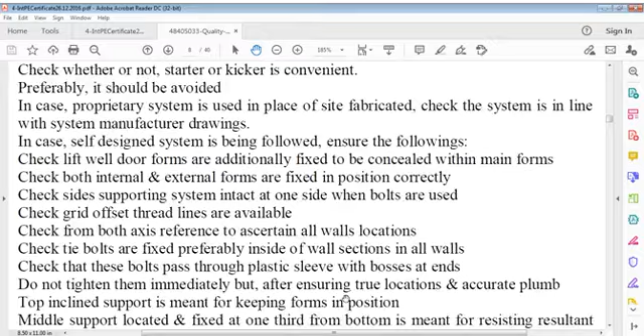of site fabricated: check the system is in line with the system manufacturer's drawing. In case a self-designed system is being followed, ensure the following. Check lift well door forms are additionally fixed to be concealed within main forms. Check both internal and external forms are fixed in position correctly.

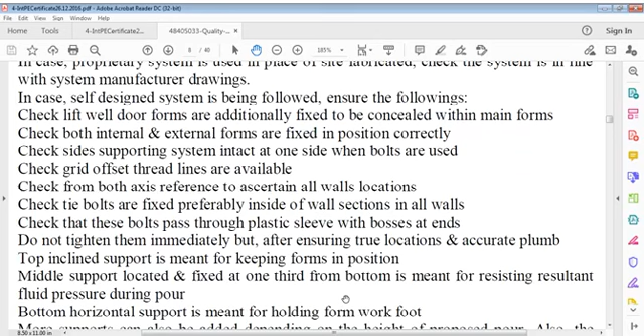But after ensuring true locations and accurate plumb, the top inclined support is meant for keeping forms in position. The middle support, located and fixed at 1/3 from the bottom, is meant for resisting the resultant fluid pressure during the pour. The bottom horizontal support is meant for holding the formwork foot.

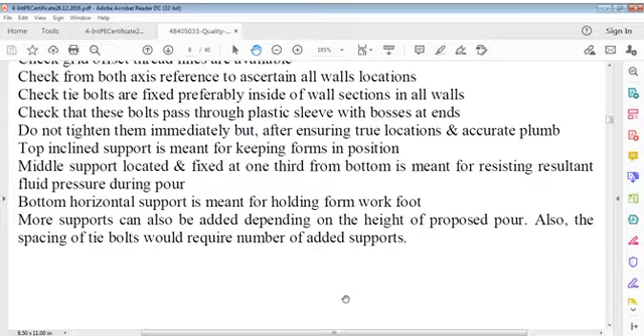More supports can also be added depending on the height of the proposed pour, and also the spacing of tie bolts would determine the number of added supports. Check whether or not tie bolts have been designed to withstand forces imposed by liquid concrete safely. Check all corners of forms are well anchored without any worry of opening or relocation of forms or getting twisted.

Also check internal forms, which should be provided with adequate cross inclined supports located in the middle of forms at various locations. Check whether or not heavy plumb bobs are hung from the top of forms at at least 3 or more locations, depending on the length of the RCC wall. A heavy plumb bob means either a heavy concrete piece or brick.

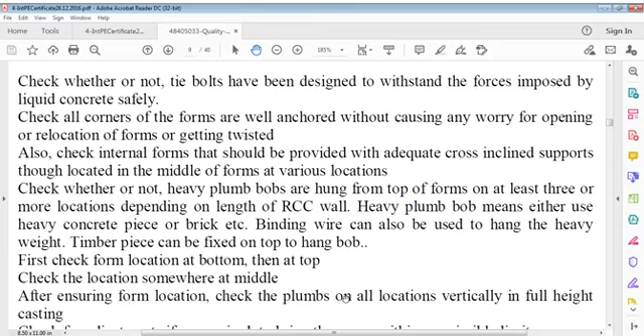Binding wire can also be used to hang the heavy weight. A timber piece can be fixed on top to hang the bob. First check form location at the bottom, then at the top. Check location somewhere at mid after ensuring form location. Check plumb at all locations vertically over the full height of casting. Check for adjustments if required to bring errors within permissible limits.

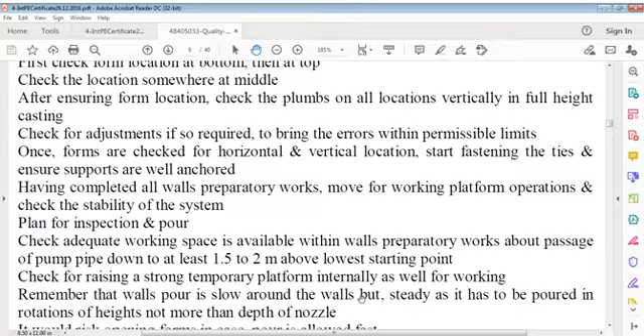Once forms are checked for horizontal and vertical location, start fastening ties and ensure supports are well anchored. Having completed all wall preparatory works, move to working platform operations and check stability of the system. Plan for inspection and pour. Check adequate working space is available within the walls for passage of pump pipes down to at least 1.5 to 2 meters above the lowest starting point.

Check for raising a strong temporary platform internally as well for working. Remember, the wall pour is slow around walls but steady, as it has to be poured in rotation of heights not more than the depth of the nozzle. There's a risk of opening forms in case the pour is allowed fast. Walls are not an element like columns or beams and therefore require good checks and attention. Lift well walls are a complicated pour that should be taken due care of.

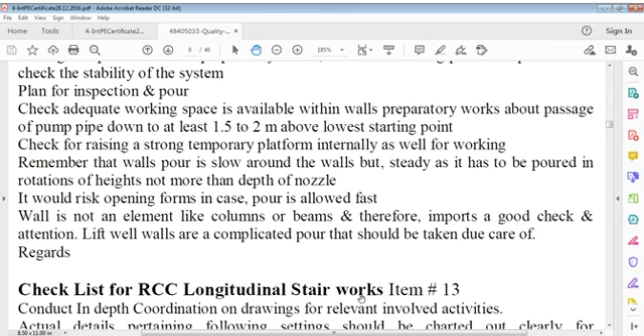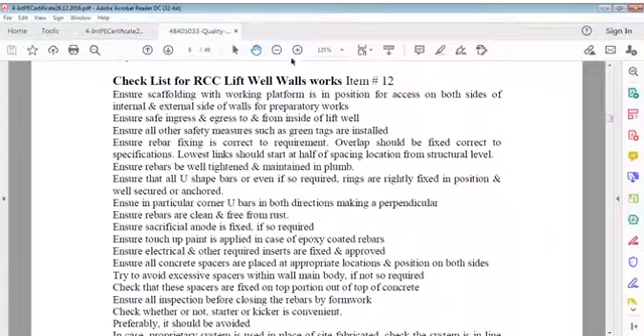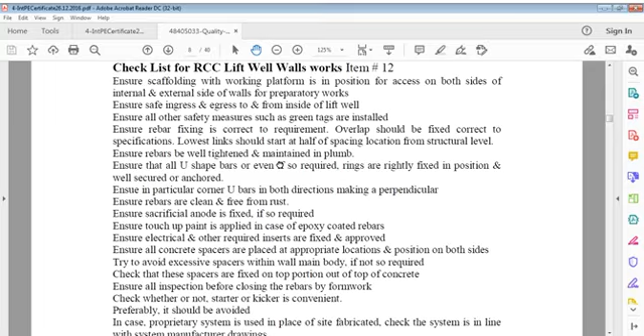Better if you can read this. I just zoom out, sorry, and I think maybe you are able to read this. I cannot say in zoom also, but let us see if you can. It's not coming full even now. Well, I'll put it in two stages. Let me put half first. I put it here, and then I'll take another portion. So let us say I put this page here first. I hope that you can read it carefully.

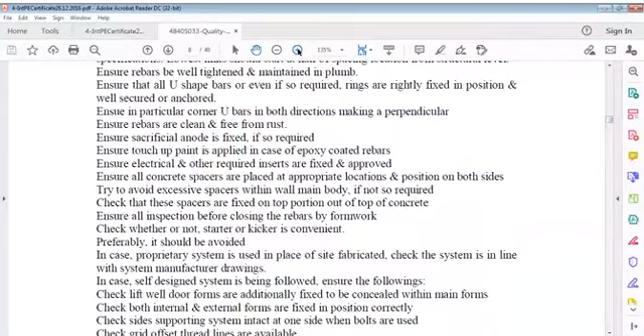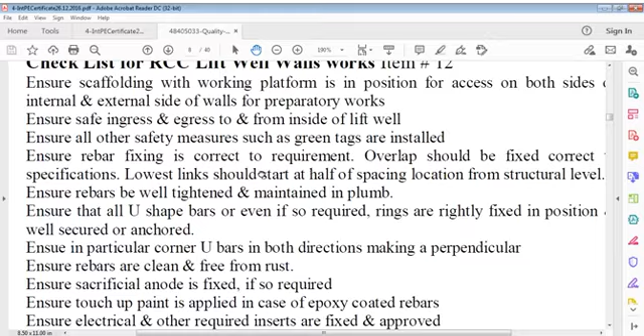It's this long. It will take 5 minutes for you to read this. Then another 5 minutes I'll give you. Meanwhile, you can enjoy for 5 minutes if you can. It doesn't make much difference because it should be clear. Maybe you're not fast. You can note it down. No problem, I give you time. You can note it down, and I'll give another 5 minutes as well.

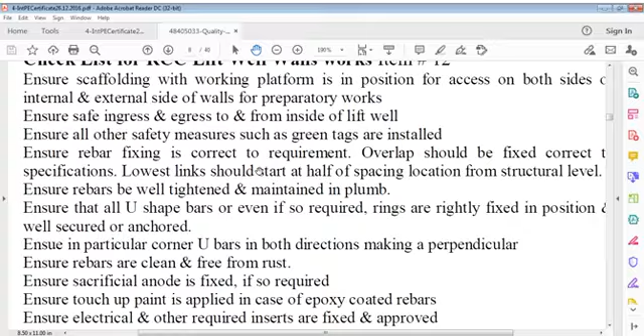So you must have read it, I think. Let us see the next issue on this. You should understand the whole show. You must have gone through.

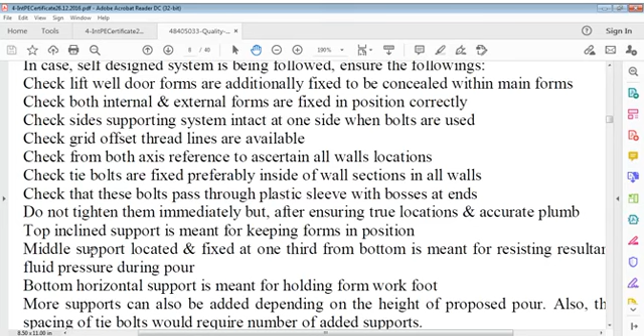Now, longitudinal stair work. Longitudinal stair: long span, parallel to the waist slab, not to the stair step edges. We have to understand this very well. RCC longitudinal stair works. What is that?

Conduct in depth. Now, it is coordination that we have to take care of here. A stair means a bridge, you can say, between two floors. A different kind of bridge between two floors. This connects one floor to the other and then it continues.

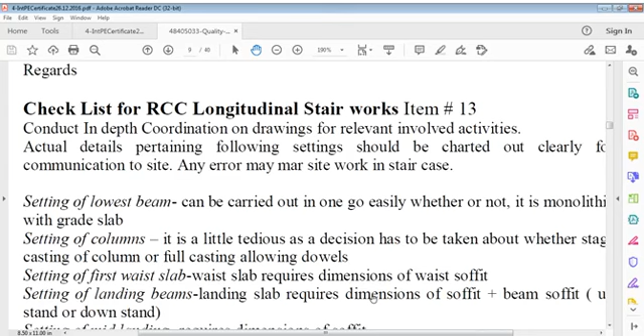A longitudinal stair goes from the lower level to the upper level, and there is a landing in between. It connects this floor to the upper floor by a continuous flight, then landing, then flight, and then floor. There are two flights. Generally, if you take a dog-legged stair, there is one landing in between, common to both floors.

There is a beam, and also at floor level there is of course a beam connection. So two connections at slab level, lower slab and upper slab, and at landing level there's a beam which fixes it. So three supports: mid beam and two floors. It is not necessary that there should be a column at floor level. It's not necessary.

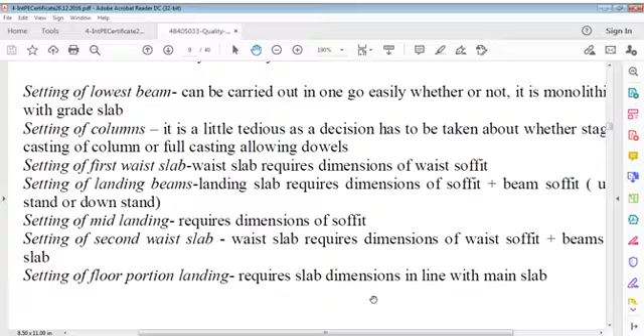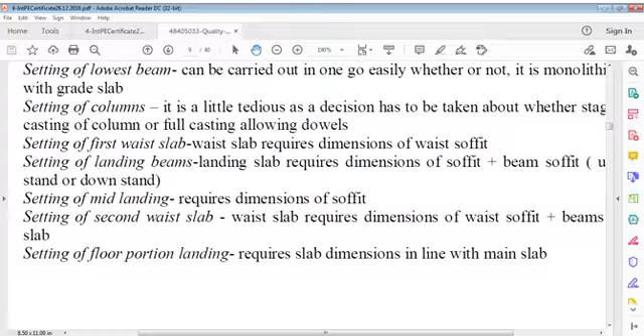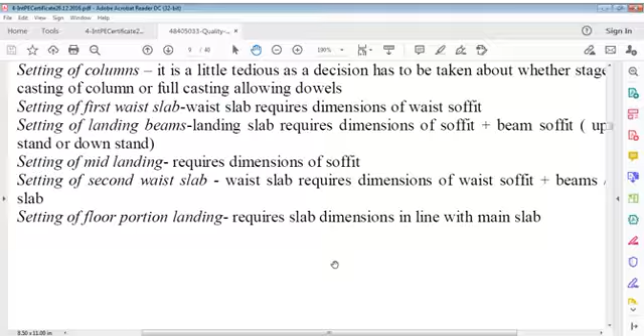Setting of the lowest beam can be carried out in one go, easily, whether or not it's monolithic with the grade slab. Setting of columns is a little tedious, as a decision has to be taken about whether stage casting of column or full casting allowing dowels. Setting of the first waist slab requires dimensions of the waist soffit, which you don't have; you have to find them. Setting of landing beams and landing slab requires dimensions of soffit plus beam soffit, upstand or downstand.

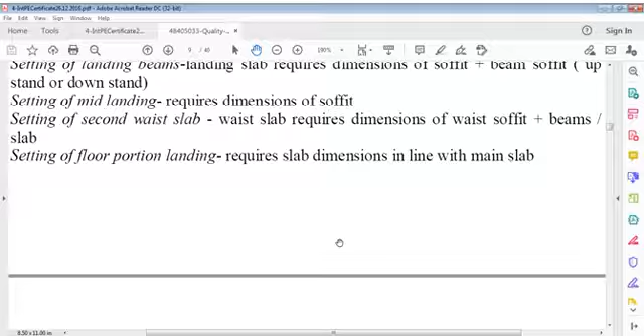Setting of mid landing requires dimensions of soffit. Setting of the second waist slab requires dimensions of waist soffit and beams of slab. Setting of the floor portion landing requires slab dimensions in line with the main slab. Setting of floor beams requires the surrounding beams. Ensure riser and tread dimensions, very significant. Ensure structural floor height to structural floor height matches the riser size, the number of risers multiplied by the size of riser. In general, calculating and setting dimensions is a cumbersome process.

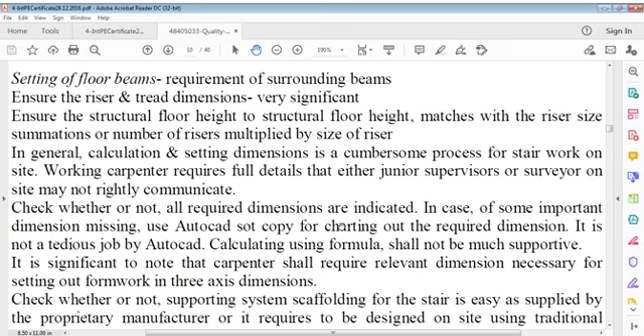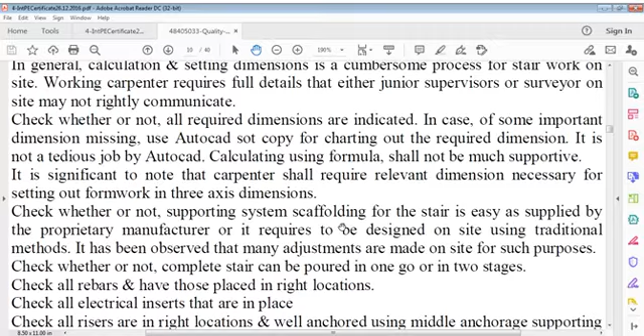For stair work on site, the working carpenter requires full details that junior supervisors or surveyors on site may not rightly communicate. Check whether or not all required dimensions are indicated. In case some important dimension is missing, use the AutoCAD soft copy for charting out the required dimension. It's not a tedious job in AutoCAD. Calculating using formulas shall not be much supportive. It's significant to note that the carpenter shall require the relevant dimensions necessary for setting out formwork in 3-axis dimensions.

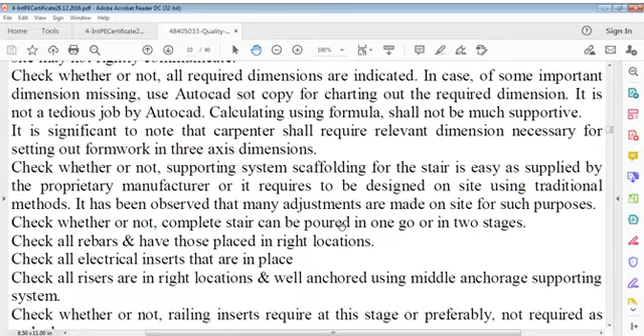Check whether or not the supporting system scaffolding for the stair is easy, as supplied by a proprietary manufacturer, or requires to be designed on site using traditional methods. It's been observed that many adjustments are made on site for such purposes. Check whether or not the complete stair can be poured in one go or in two stages. Check all rebars and how they are placed in the right location. Check all electrical inserts are in place. Check all risers are in the right location and well anchored using a middle anchorage supporting system.

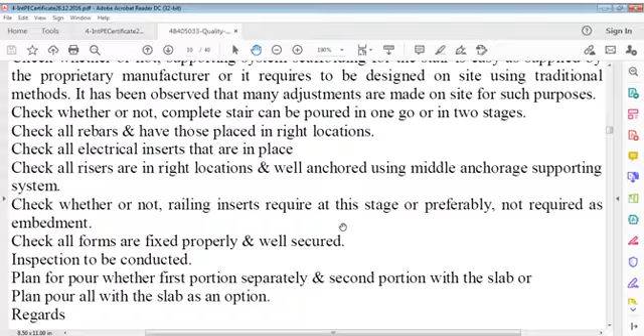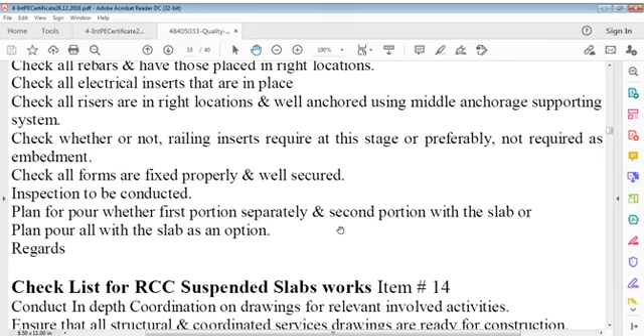Check whether or not railing inserts are required at this stage, or preferably not required as embedments. Check all forms are fixed properly and well secured. Inspection to be conducted. Plan the pour, whether the first portion separately or the second portion with the slab, or pouring all with the slab is an option. This is just the background I have given you. Now we talk.

Now, I said beams at landing level, and then the carpenter requires to fix bottom shutters or soffit of the landing beam, waist slab, and your slab or grade slab or basement slab, whatever. It's your decision. If it is a basement slab, then you have to start from a beam at basement level.

Because generally bottom slabs or grade slabs are not structural ones. So you have beams in foundations. So your waist slab at the lowest level, or you can say zero rise, should be given a beam, an ordinary beam, and there you have to draw it in your drawing software.

After that you have to draw, based on your stair riser and tread, whatever hypotenuse diagonal you get, you have to draw a parallel line based on thickness of your stair. Already steps are in, you have drawn all steps, and you have connected that line parallel to this. If thickness is 25 centimeter or 20 centimeter, according to calculations, you can draw a line. So this line profile of waist slab, of landing, of soffit of landing, and beam at the floor, you can find out different dimensions.

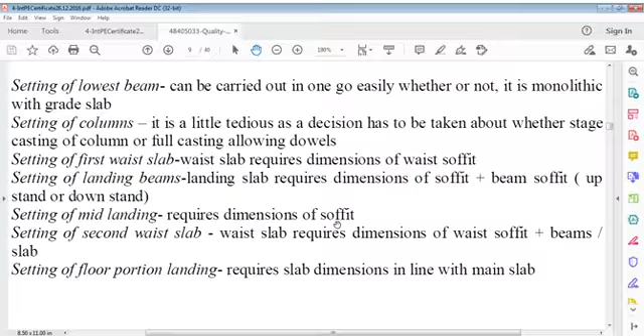I explained to you lift preparatory works. We'll go now to suspended slab works. Suspended slab. Why do we call it suspended slab? We have to answer this first. Because it's suspended. Suspended where? It is suspended in framing, suspension. Of course, it is supported.

We call it sometimes in an ordinary way simply support. We call it partial fix. We call it fix. But because every horizontal member has a tendency to sag, because it is suspended, it's not fully supported. It is supported through beams to columns. The portion between beams, this diaphragm portion, thin slab portion, has, due to load, a tendency to move down, sag, and of course it would recover. This is called deflection. So it's suspension either on all supports or a continuous suspension at one support. That's the meaning of suspended slab, it doesn't mean something else.

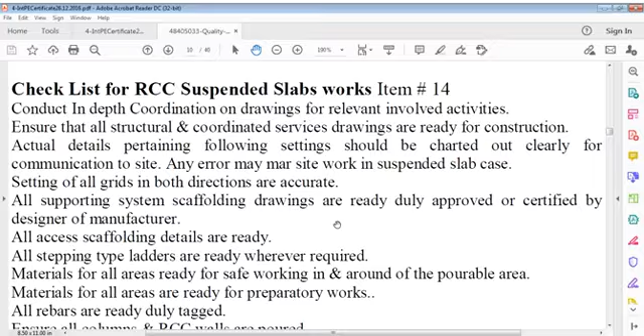Setting of all grids in both directions are accurate. All supporting system scaffolding drawings are duly approved or certified by designer or manufacturer. All access scaffolding details are ready. All stepping type ladders are ready wherever required.

Material for step type ladders, be clear what is the step type, don't be confused. It is only a temporary item, temporary work. There are two kinds of ladders. One is ordinary ladder where you can step - if there is no riser, no tread, just some rod. The other one is like a stair, with full riser and full tread, so that no one can view from below, and also it is secure so you can freely ascend and descend. That type of stair.

We have done it, it will be used many times. If done, even if it will not be used at that place, it will be used somewhere else. That combination, some stepping type ladders are ready wherever required, and when there are step type ladders with railing as well on both sides. Materials for all areas ready for safe working and around of pourable area.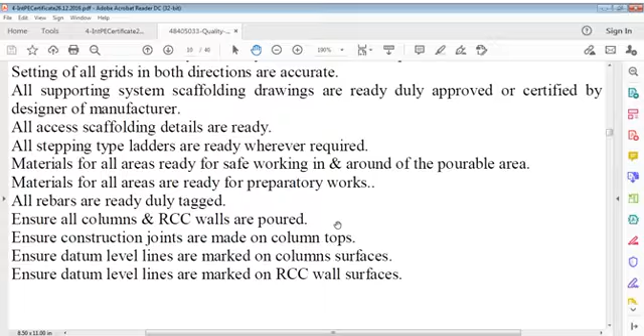All we have to consider that. Ensure datum level lines are marked on columns surfaces, and ensure datum levels are marked on RCC wall surfaces for reference. Ensure erection of supporting either mechanical system or other system is well handled by a specialist trained team of riggers. Ensure that erection or installation of system provides a good space to circulate within.

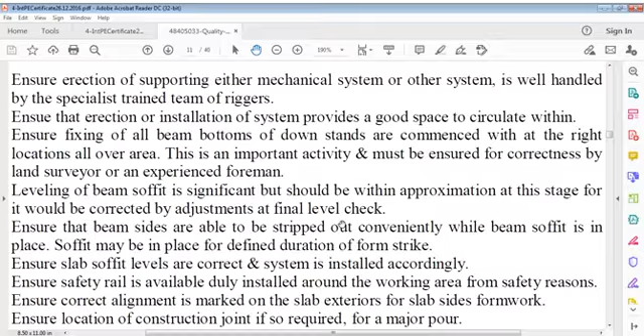Circulate within. Ensure fixing of all beams, bottoms or down stands are commenced at right location all over the area. This is an important activity and must be ensured for correctness by land surveyor or an experienced foreman. Leveling of beam soffit is significant but should be within approximation at this stage, for it would be corrected by adjustments at final level check.

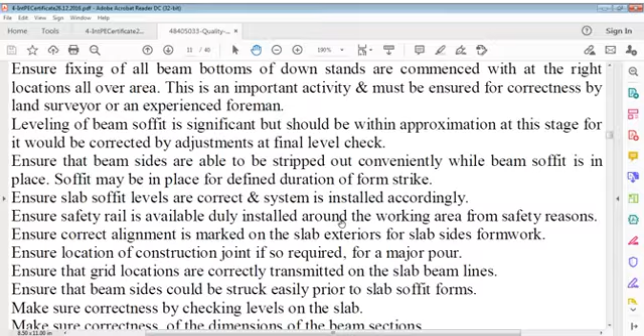Ensure that beam sides are able to be stripped out conveniently while beam soffit is in place. Soffit may be in place for defined duration of form strike. Ensure slab soffit levels are correct and system is installed accordingly.

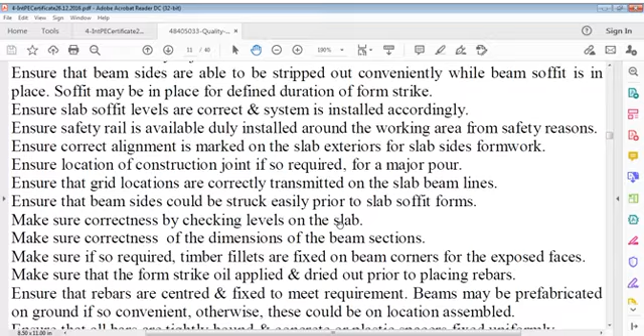Ensure safety rail is available, duly installed around working area from safety reasons, safety point of view. Ensure correct alignment is marked on slab exteriors for slab sides formwork. Ensure location of construction joint if so required for a major pour. Ensure that grid locations are correctly transmitted on slab beam lines. Ensure that beam sides could be struck easily prior to slab soffit forms.

Make sure correctness by checking levels on slab. Make sure correctness of dimensions of beam sections. Make sure if so required, timber fillets can also be fixed on beam corners for exposed faces. This timber fillets means chamfers, you can say.

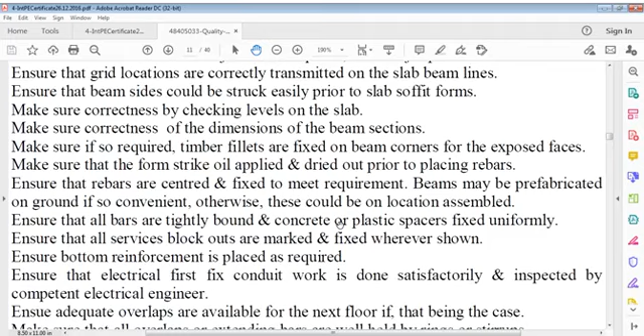And make sure that striking oil, you can say, applied and dried out prior to placing rebars. Ensure that rebars are centered and fixed to meet requirement. Beams may be prefabricated on ground if so convenient, otherwise these could be on location assembled. Beams means not concrete beams, reinforcement beams I'm talking. Ensure that all bars are tightly bound and concrete or plastic spacers fixed uniformly.

Ensure that all services block outs are marked and fixed wherever shown. Ensure bottom reinforcement. Ensure bottom reinforcement.

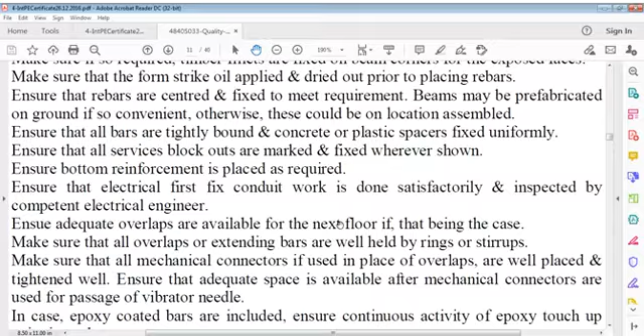Ensure adequate overlaps are available for the next floor, if that is the case. Overlaps of what? Overlaps of columns. Make sure all overlaps or extending bars are well held by rings or stirrups. Make sure that all mechanical connectors, if used in place of overlaps,

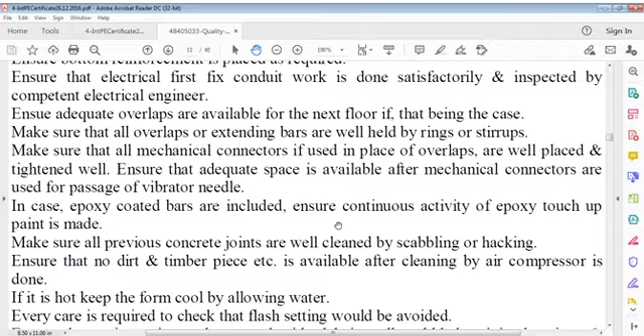then ensure that adequate space is available after mechanical connectors are used for passage of the vibrator needle. In case epoxy coated bars are included, ensure continuous activity of epoxy touch-up paint is made.

Make sure all previous concrete joints are well cleaned by scabbling or hacking. Ensure that no dirt and timber pieces etc. are left after cleaning by air compressor is done. If it's hot, keep the form cool by allowing water. Every care is required; check that flash setting is avoided.

Flash setting would be avoided. Ensure that the stair portion to be poured with the slab is well scabbled at joint locations and rebars are cleaned properly.

Ensure cleaning of the lift well. Ensure clearing of lift well bars, the rebars which are left and should connect to the slab. Ensure clearing of lift well bars which are projected, because the slab shall meet there as well.

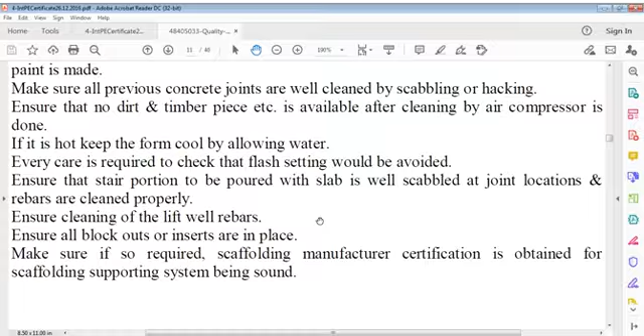Ensure all block-outs or inserts are in place. And make sure, if so required, scaffolding manufacturer certification is obtained for the scaffolding supporting system being sound, because it may be their design. Make sure portions of beam downstands are well secured by fixing tie bolts,

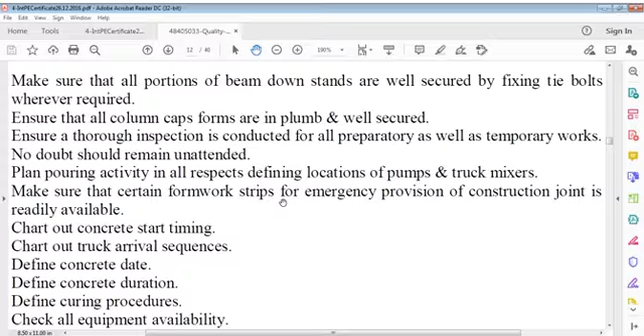wherever required. Ensure that all column shutter forms are plumb and well secured. Ensure a thorough inspection is conducted for all preparatory works as well as temporary works. No doubt should remain unattended. Plan the pouring activity in all respects, defining locations of pumps and pour.

You can say chart out concrete start timing, then chart out truck arrival sequence.

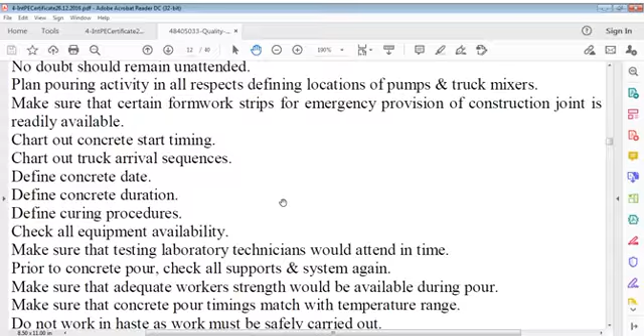We have to make sure further activities are completed, which are very important from this point of view. The time is very short: chart out concrete start timing, chart out truck arrival sequence, define concrete date, define curing procedures, check all equipment availability, make sure that testing laboratory technicians attend in time. Also, prior to concrete pour, check all supports and support systems.